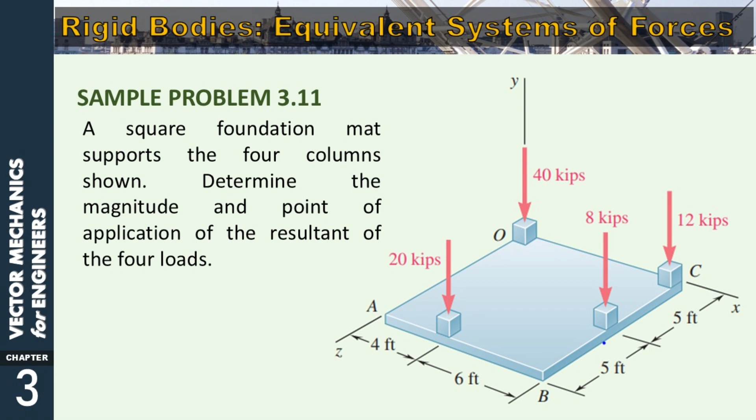For sample problem 3.11, we have a square foundation mat that supports four columns shown. Determine the magnitude and the point of application of the resultant of the four loads.

We have here four loads applied at different points. Say this is our force 1, force 2 here, this is force 3, and lastly this is force 4. What he wants here is we need to find the magnitude of a force and the position of a force where, if we apply that force to that point, the static condition of that single force would

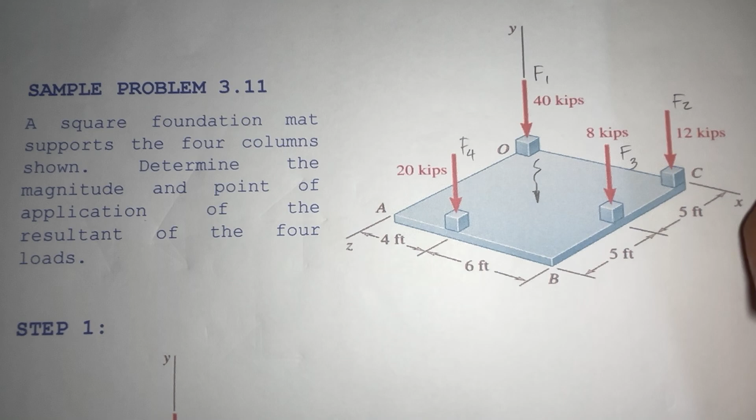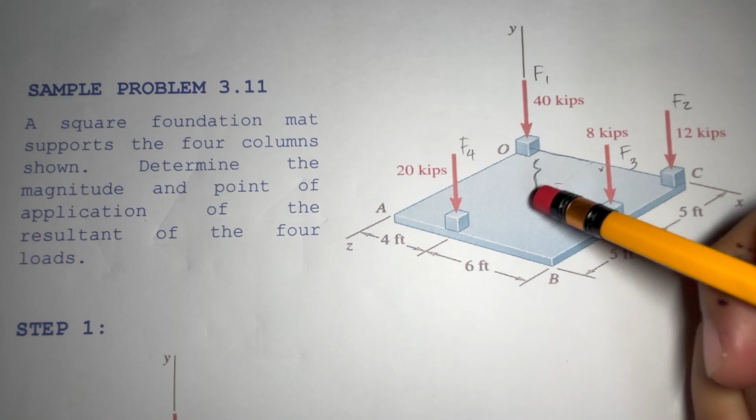be equal to the four loads applied at different points. So what we want to know here is its location from our origin. Where would we apply that force and what would be the magnitude of that force? Location would mean the distance along x and along z here. X and z only, because we don't have any components along y. So we have our x and z here.

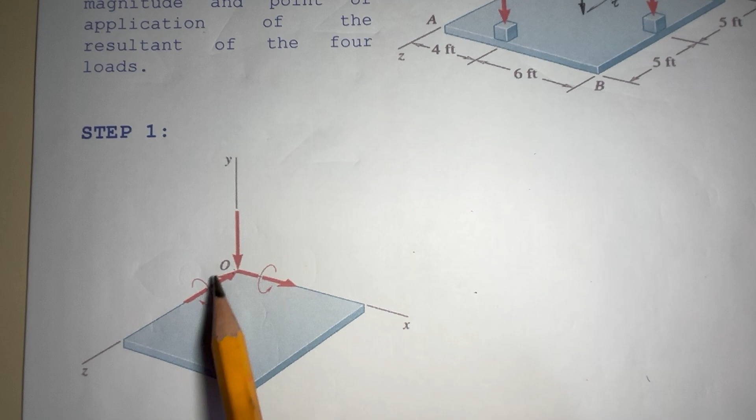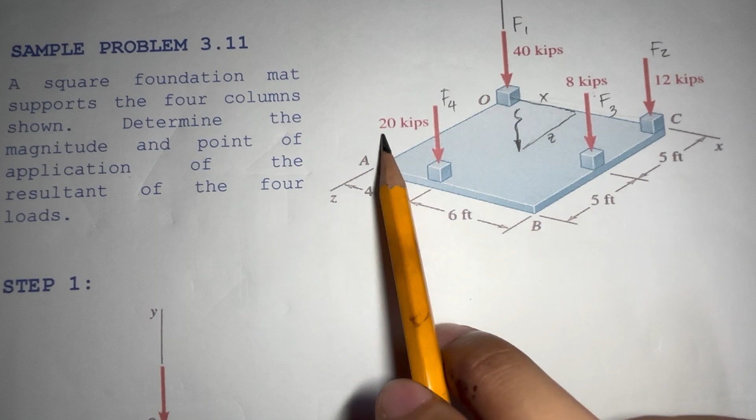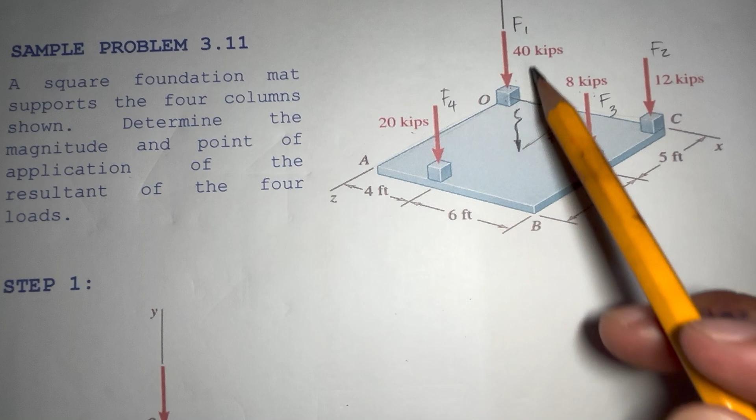So step 1, we need to transform this system into a force couple located at point O. This force couple has components along x, y, and z. But looking here along our x-axis, force 3 (the 8 kip force) and the 20 kip force would tend to rotate our foundation on our x-axis. And these forces 20, 8, and 12 would somehow create a moment along our z-axis. These forces can't rotate our square foundation along the y-axis. That's why we don't have any rotation along y-axis, only along x and along z.

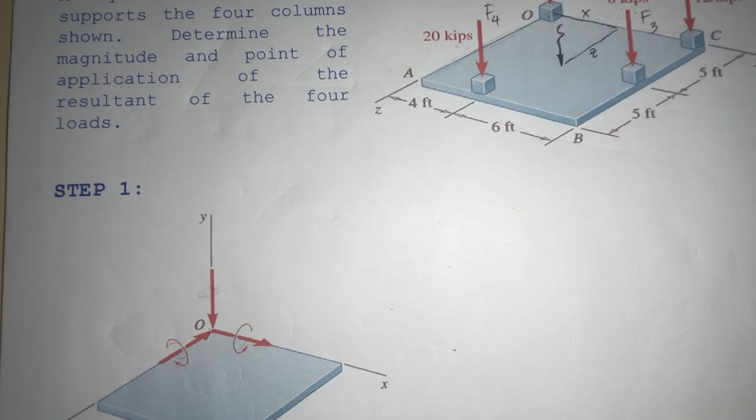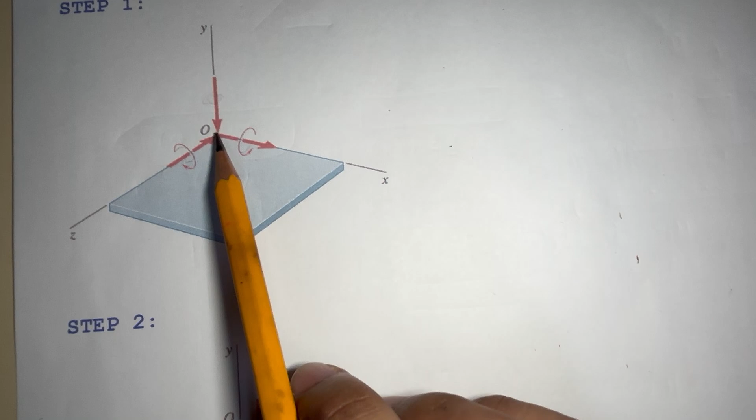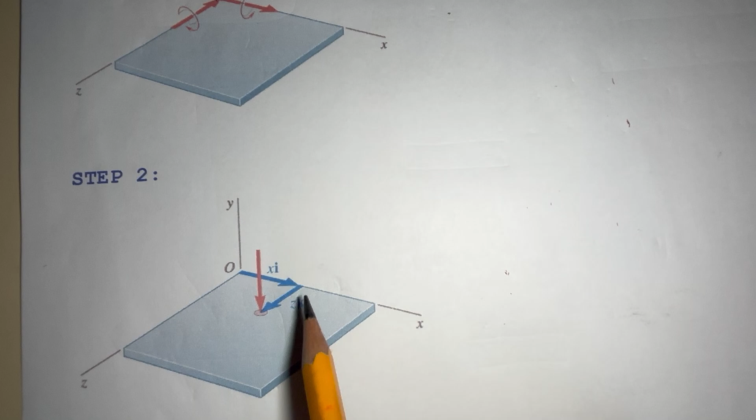So the first step is to create a force couple, an equivalent force couple located at point O. After that, having known the magnitude of our force couple at point O, we will then transform this force couple into a single force located at xz, since the location of this force is unknown. So xz. Okay.

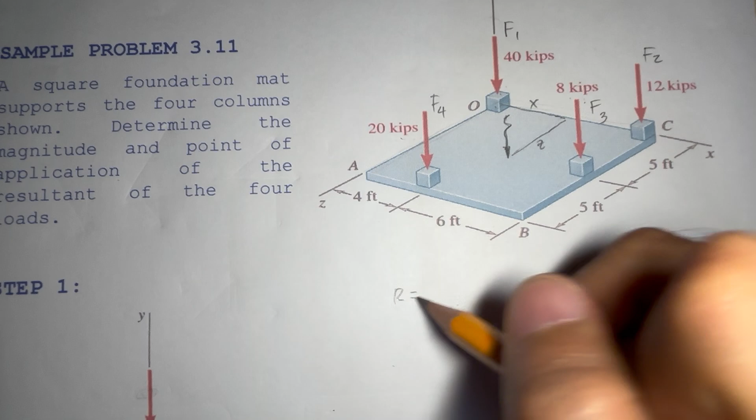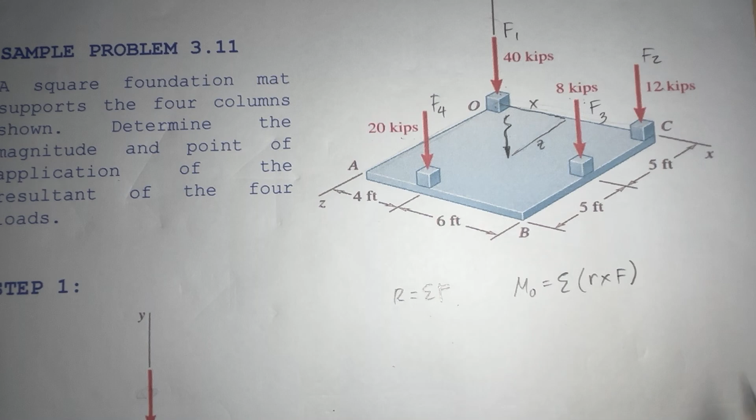For our first step, in order to transform these forces into a force couple, the formula we need to fill is the summation force couple. We have our R as the summation of all forces, and our moment at point O as the summation of R cross F pivoted at point O. So what we need here are all the moment arms and all the forces. It's better to create a table for this kind of problem.

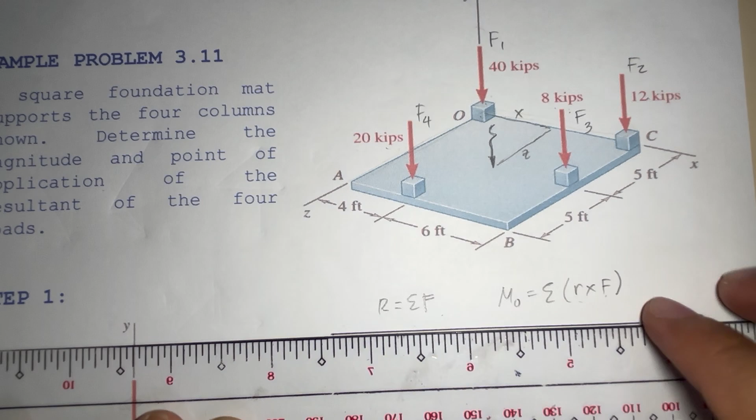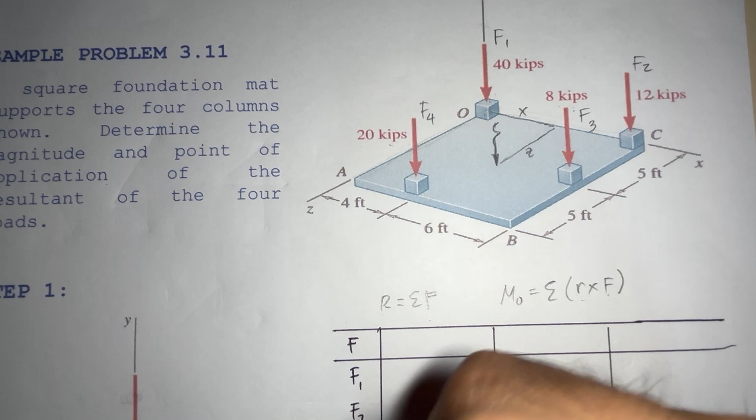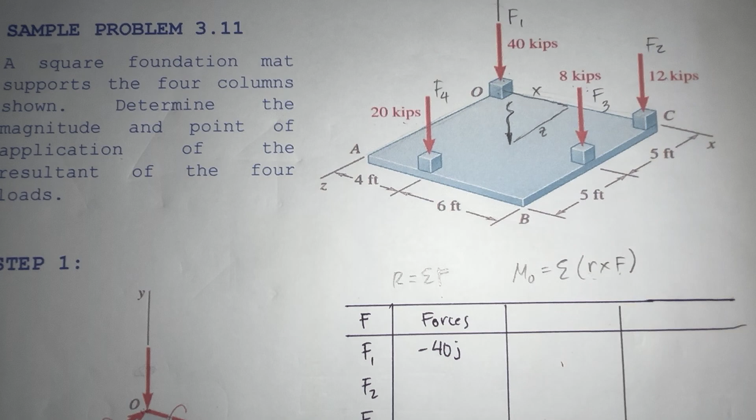Now if we have our table, we may write all the forces here: F1, F2, F3, and F4. For F1 we have 40, directed towards the negative J, so we have negative 40J. For F2 we have negative 12J. F3 is negative 8J, and lastly F4 is negative 20J.

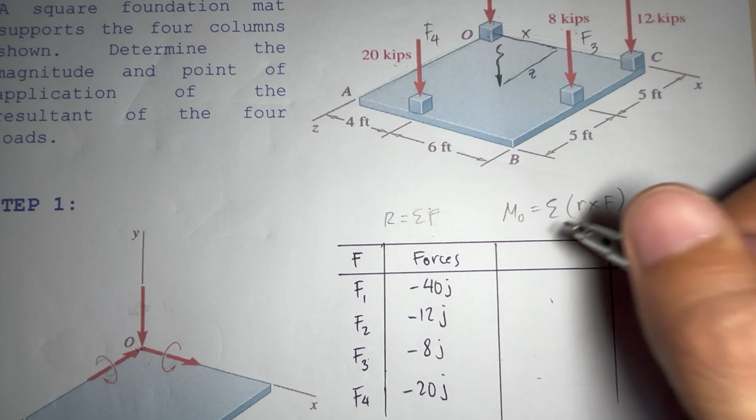How about R, the moment arm? The moment arm for F1, since it's located at the origin and that is where our pivot point also is located, would be 0. How about F2? It's located on our x-axis, so it has no components along y and along z. We only have this distance here, which is 4 plus 6, that is 10, and it's positive, so we have 10i.

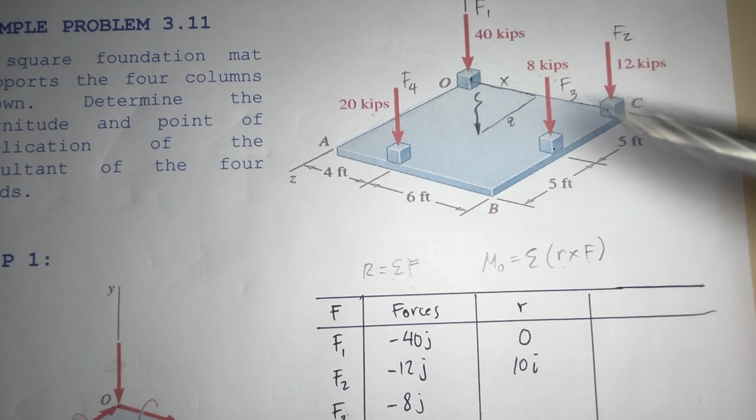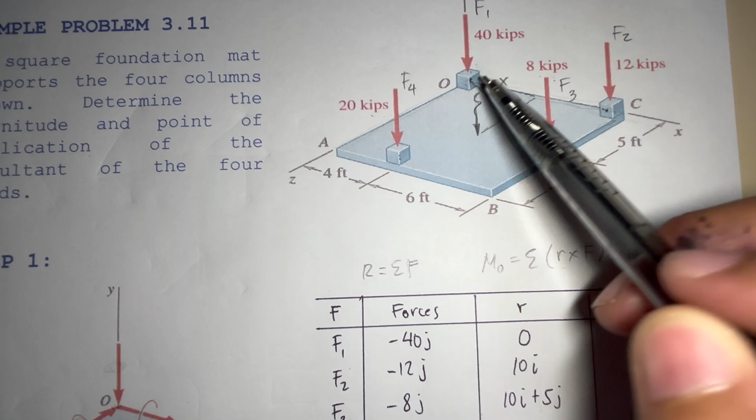How about F3? From the origin going to that direction, in order to go from point O to this point, we need to go 10 units along the x-axis and 5 units along the z-axis, so we have 10i plus 5j. Lastly for F4, that would be 4 units along the x-axis, and this distance we have 5 plus 5, so 10 units along the z-axis. So we have 4i plus 10k — this should be k, not j.

So therefore, if we get R cross F to find all the moments here: we have 0 times 40, giving 0. Then i cross j is positive k, times negative, we have negative 12 times 10, giving negative 120k. For this one, i cross j is positive k, times negative, giving negative 80k. For this, we have k cross j, which is negative i, times negative, giving positive, so positive 5 times 8, giving 40i. And lastly, i cross j, that is positive k, times negative, giving negative 20 times 4, which is negative 80k.

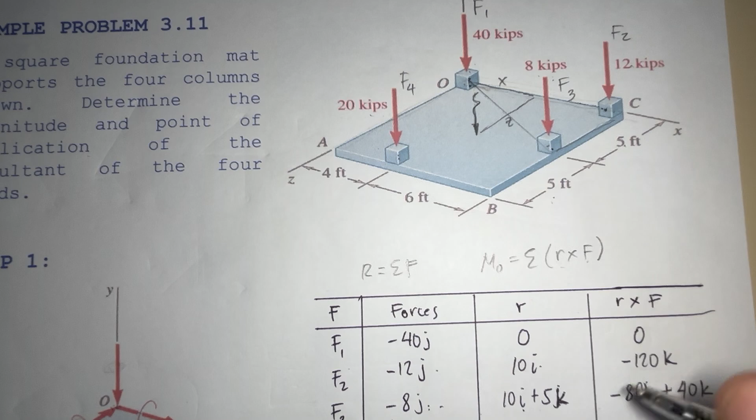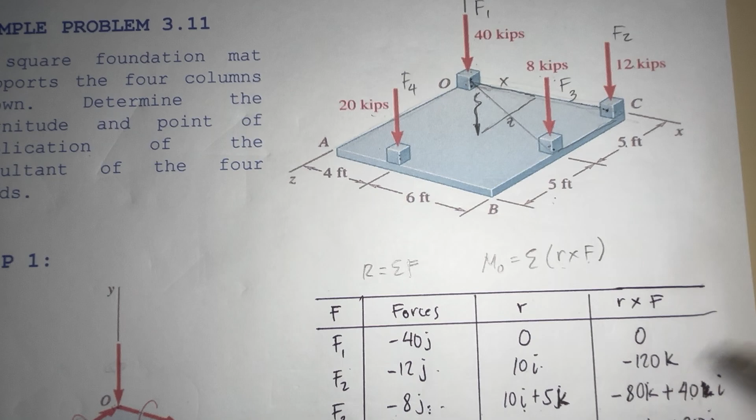And K cross J, that is negative I times negative, we have positive I. Then 20 times 10, we have 200I. So if we total this here, that would be our MO. Wait, we have K cross J, negative I times negative, we have positive, then 8 positive I, this should be positive I. So we have here 40I plus 200I, we have 240I. How about K? Negative 120 plus negative 80 plus negative 80, we have 280 negative.

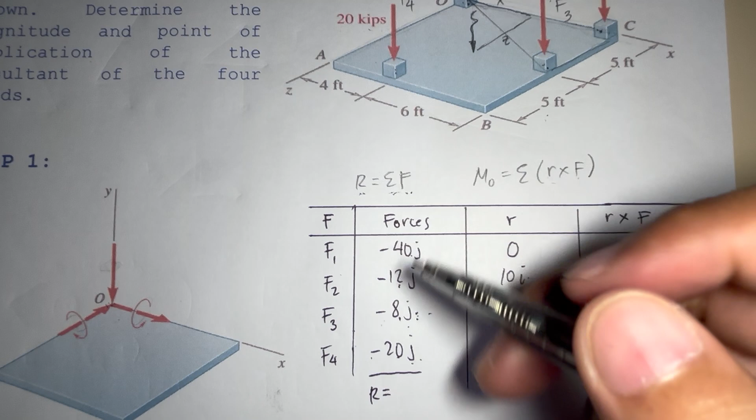And then for the summation of forces, that will mean that will be our force R. So summing this all up, that is equal to negative 40 minus 12, 52 plus 8, 60. 60 plus 20, we have 80. So we have negative 80J.

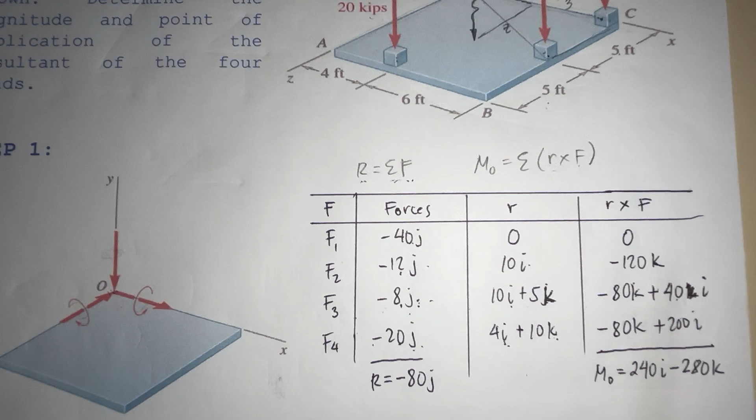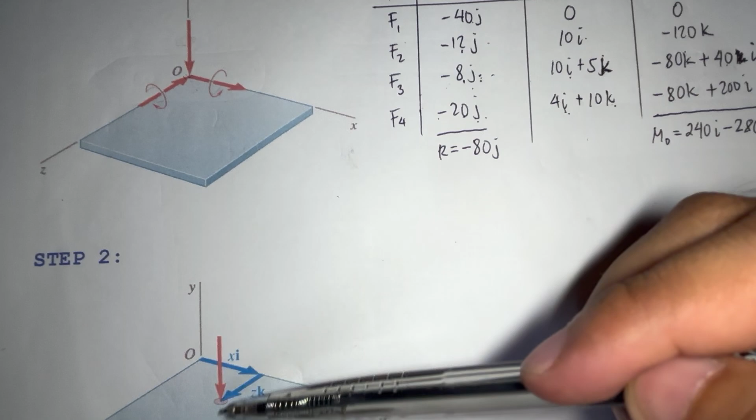So now, knowing that the force here is negative 80J and the couple is 240I minus 280K, the next step is to transfer this force and this couple from point O going to this point here. We know that if our couple is a free vector, so if we transfer from point O to this point, no additional couple shall be added.

If our couple is this one, MO, we have 240I minus 280K. No additional couple shall be added if we transfer a couple, because knowing that a couple is a free vector, we can transfer it.

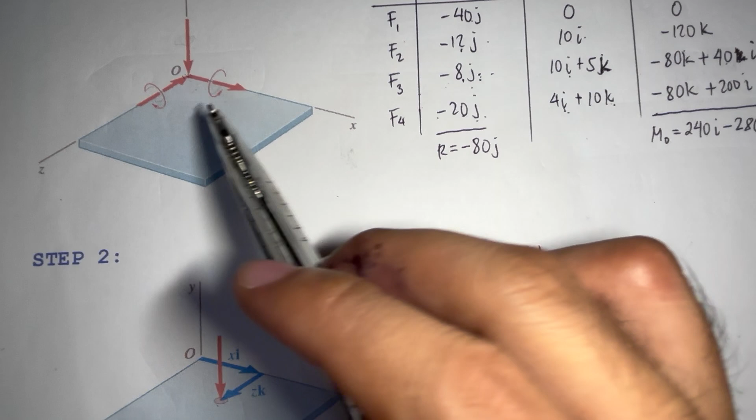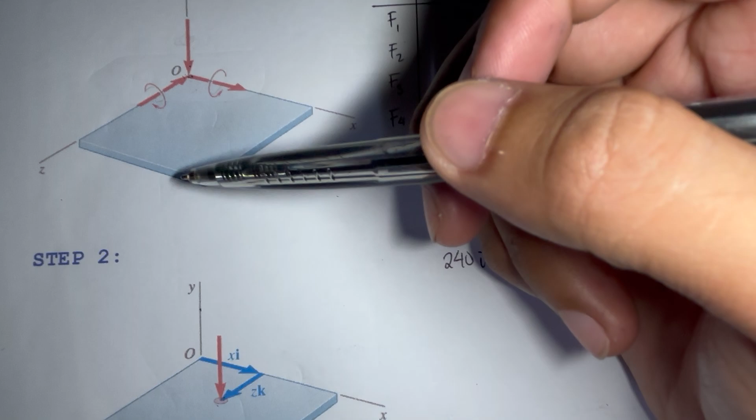And now, we have our force here. If we transfer a force from point O going to this direction, as long as our force is not along the line of action, a couple should be added. So another moment should be added. That moment here is equivalent to R cross F pivoted at the new point here.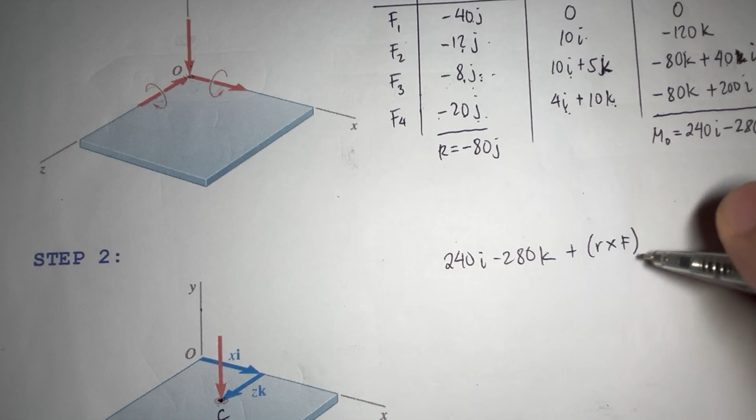So the point is one, say point C. And since what we want here is a system wherein force lang yung nag-exist at walang couple, therefore, adding the couple and the additional moment should be equal to 0 in order for the new system to have only a force and no couple at that point.

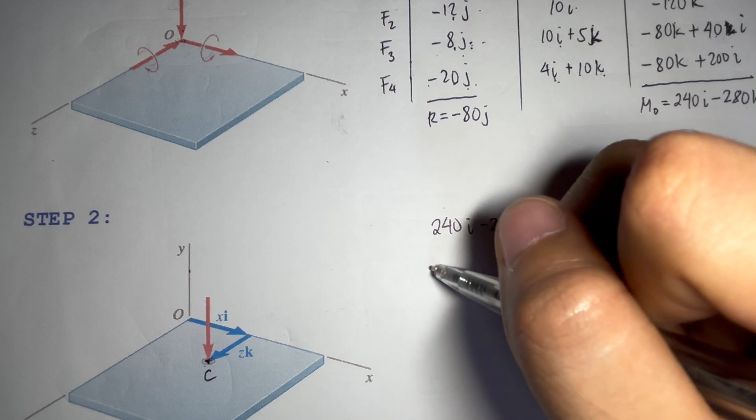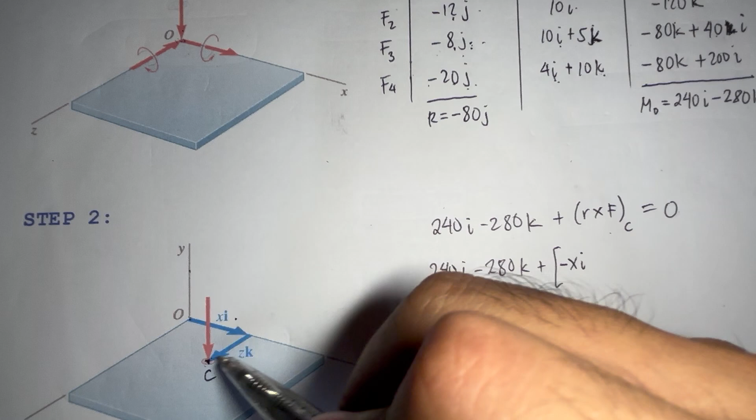Okay, now if we try to expand this one, we have here 240I minus 280K plus our R cross F. What would be our R? So our R here is from pivot point going to this direction here. The direction of xi should be reversed because we're going from point C to point O, so we have negative xI, and also for z, that should be reversed, we have negative zK. Cross F, what would be our F? F here is negative 80J. So negative 80J, that is equal to 0.

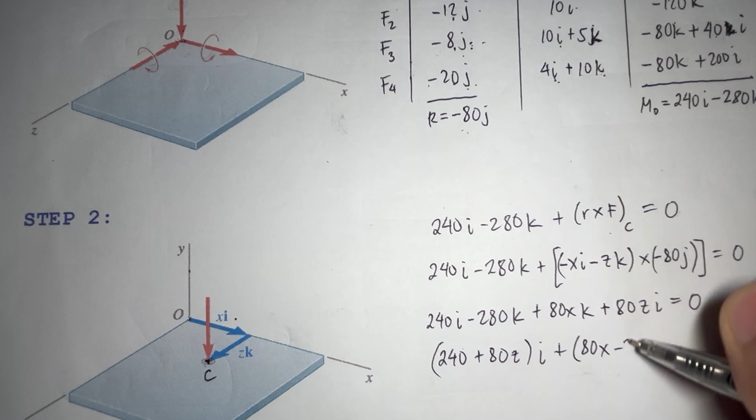We have 240I minus 280K. So I, negative times negative, we have positive. And I cross J is positive K. So we have here positive 80x K. How about K cross J? K cross J is negative I, and negative times negative, we have positive 80zI. That should be equal to 0.

So combined like terms, we have for I, we have 240 plus 80z in parenthesis I, and for K, we have plus 80x minus 280K, that is equal to 0. Now take note that the 0 here can also be written in terms of 0I plus 0K. So in order for the expression on the left side to be equal to the expression on the right side, this term here should be equal to this term, and this term here should be equal to 0.

Okay, so if we try to solve for this one, we have 240 plus 80z should be equal to 0. Therefore 80z is equal to negative 240. Divide both sides by 80, we have our z equal to negative 3 feet.

And how about x? So we have 80x minus 280, that is equal to 0. So 80x is equal to 280, cancel, we have 80. Our x here, that is equal to 3.5 feet. This one here should be negative.

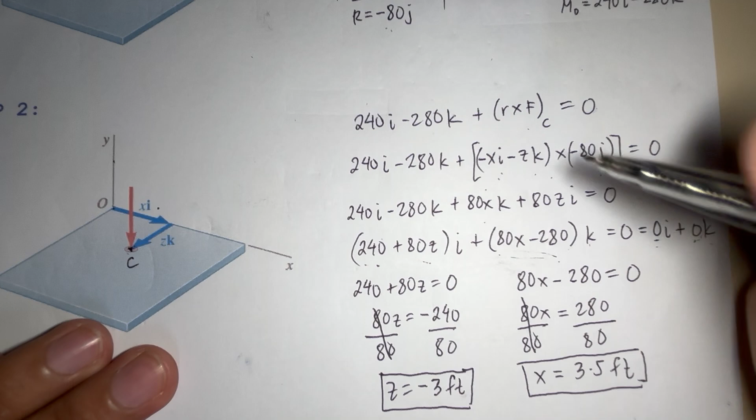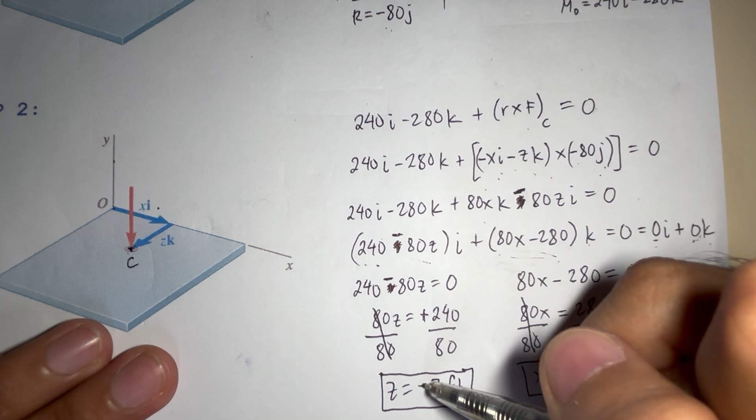We have negative times negative, positive, and then K cross J is negative I, so this should be negative. So therefore, this should be negative, and this one here is negative, and this one here should be positive. So we have positive 3 feet.